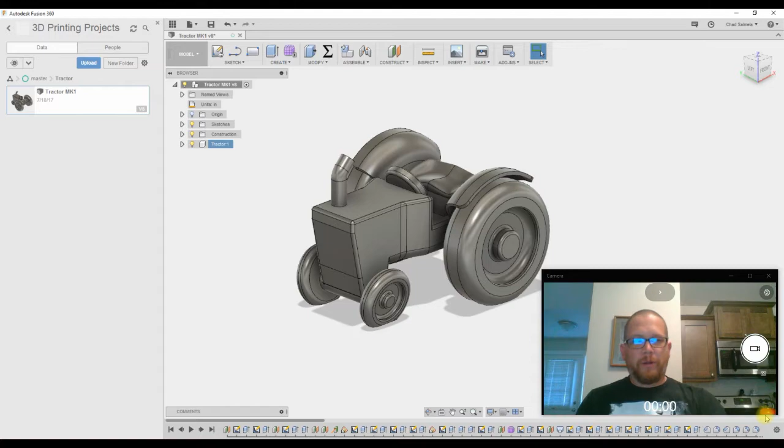Okay, we're in the computer now. I'm like in the computer. There I am. Anyway, so we have our little tractor I did the other day, and what I'm going to show you here is in Fusion, I am working in inches.

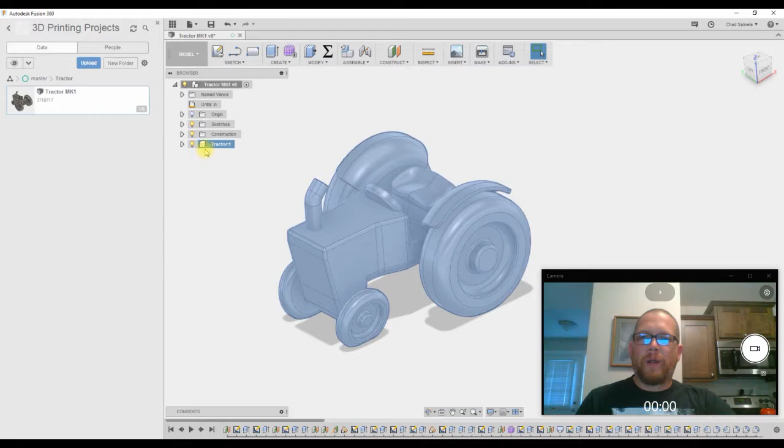So I'm going to show you what happens when you export this as an STL while still in inches. You hit export. Oops, I don't want to export, I actually wanted to save as STL. So we're on a low refinement. We're going to hit OK.

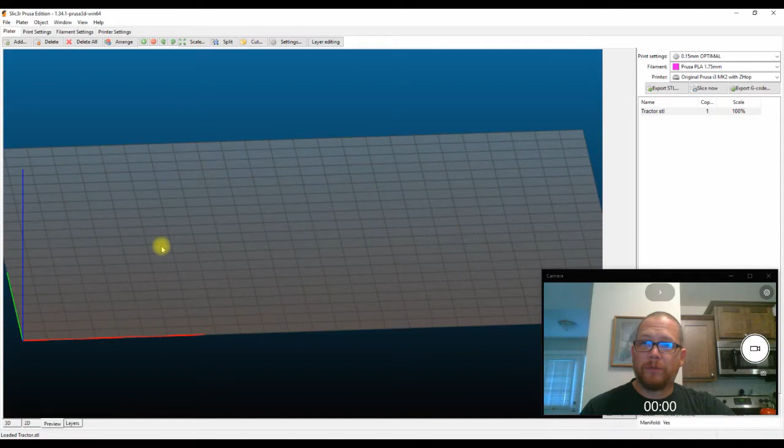Now I'm going to go to Slic3r and add the tractor STL. Well, bam, where is my tractor? I don't even see it on here. Oh, you know why? Because I'm in preview. Wow, I was doing another project. Anyway, I haven't sliced it yet, that's why I couldn't see it.

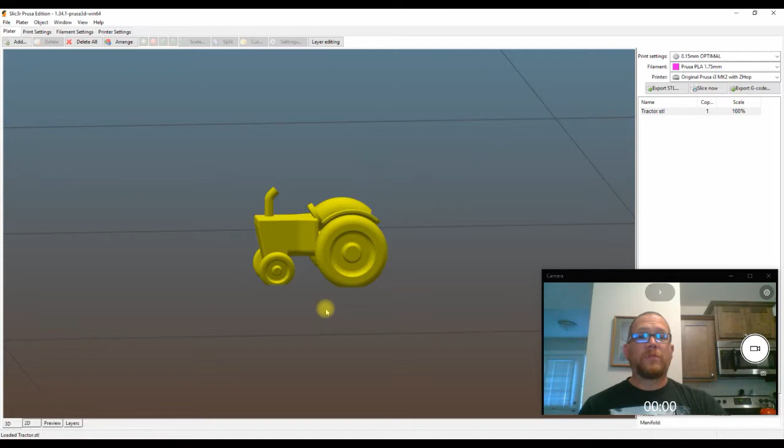That's another thing: when you bring something into Slic3r after working on other stuff and can't find it, it's probably because you're still in the preview tab and it's not sliced. So here's this little tractor, and by little tractor I mean it is little, so it's probably too tiny to print. I really don't think that's going to work well. So I'm going to delete that.

What I do to fix this problem, you can do some other stuff. You can scale up the part inside the slicer, do the math and scale it from millimeter to inch, but I find it doesn't always come out to be exactly right. So I like to do this: I go back to Fusion.

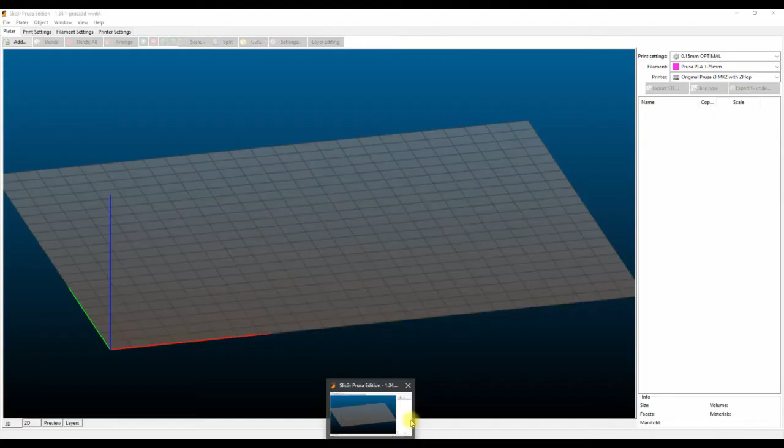I go back to Fusion, and usually what happens is I slice it, bring it in, and go, oh, it's too small. So then I have to jump back into Fusion. I come up here to my units and select my units, go down to millimeter, and hit OK. Now my units are in millimeter.

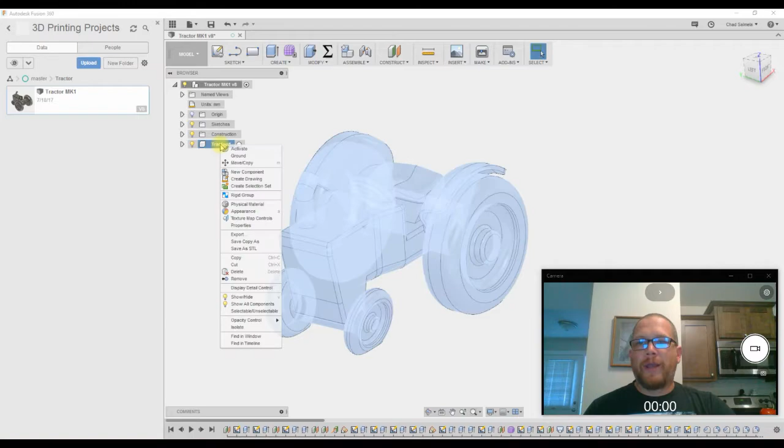Now when I hit Tractor, save as STL, it's going to pop up again. I hit OK, hit Tractor, save, and yes, replace it. Then I bring it into the Slic3r again, and this time it is bigger. There it is, that's all you have to do.

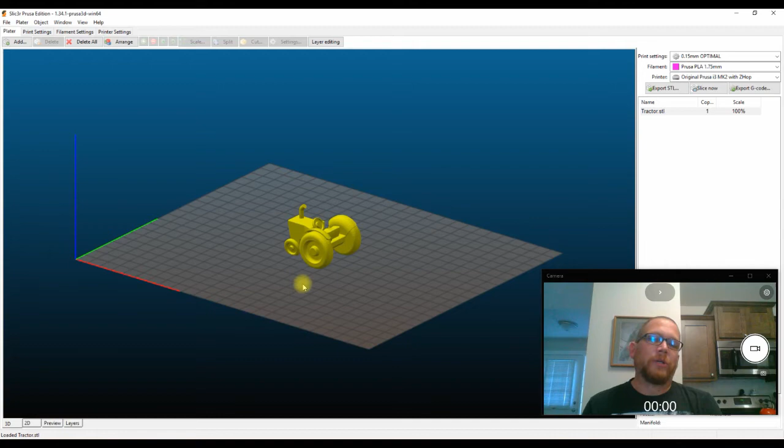So really the only thing I'm trying to show you here is, because when I first saw it, I wasn't catching on that it was just a matter of switching my units in Fusion. All you have to do is switch your units back and forth when designing. The only thing is, if you switch to millimeters then go back and try to do something in inches, like make something 3 inches, it only goes a tiny bit, because you're still in millimeters. So you have to remember to switch it back. But that's about it, the unit measurement stuff is all kind of a generic thing. You can switch back and forth between millimeters and inches and hit OK, and nothing changes, nothing moves. It just does the math in the background and allows you to do that.